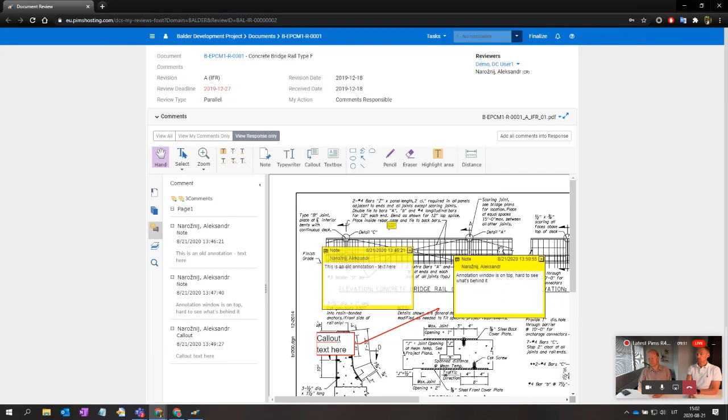Good day, if you can see my screen. So what we've heard from clients with the old version is that it's sometimes not very comfortable to use, because it's not the full screen size, and sometimes the content is just on top of the comments, or comments on top of the content, so it's not that easy to work with.

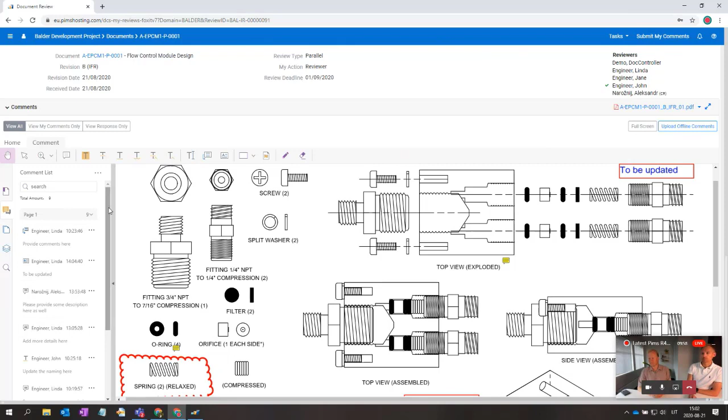So with version 7 we have rebuilt our review application and utilized the latest and greatest Foxit 7. Now you see it's more like full screen, and the biggest improvement we had was the side panel, which now contains all the content of the annotations.

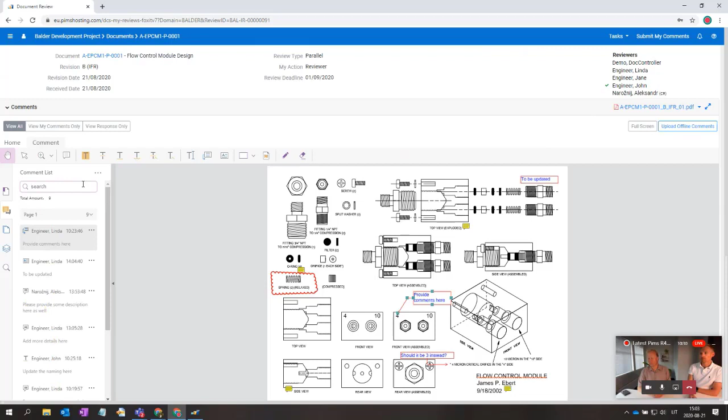So it's fully functional. If you see any annotations there, the text is provided in the list. You will see the whole list of annotations. More than that, if you just click on them, it will scroll to the correct page and highlight it. It's also searchable, so I can see comments by person or by text, like this.

Now annotation tools also support undo and redo features. So if you type something wrong, you can just use control to undo it. And with this latest version, we have improved tools like pencil, clouds, and annotations, clouds, rectangles and circles, for example.

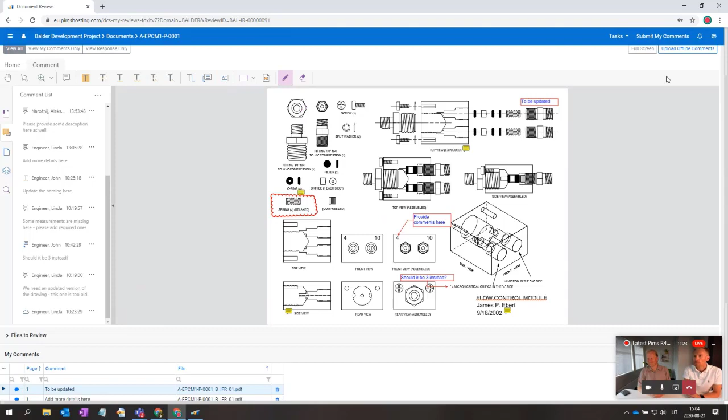So now you see I'm doing some markups using my pencil, and it will be one annotation, not separate strokes as it was before, which is quite comfortable to use. Full screen is what we finally have. This is fully functional full screen. You can just even hide the comments tab, and there you go.

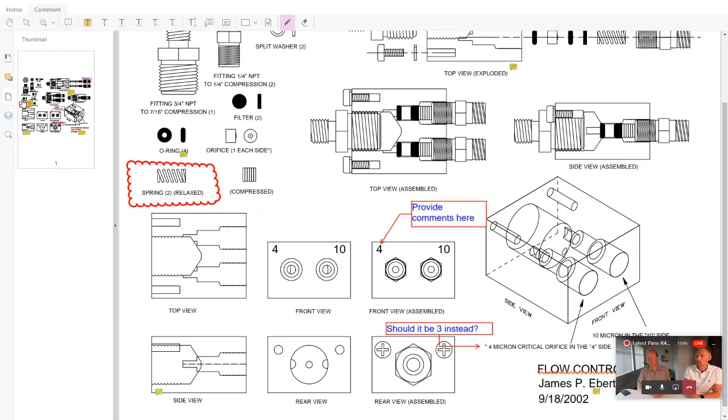Version 7 of Foxit also has improved performance on huge files with several hundred pages, which is quite quick. You have this thumbnails panel where you can just scroll very quickly and see all the annotations in there. And also just to mention that while rebuilding this application from scratch, we've tried to have as minimal read and write operations to the database as possible, just to improve the performance for users.

So that's it from my side. If you want any more details, just contact me or anyone in our teams. Thank you.

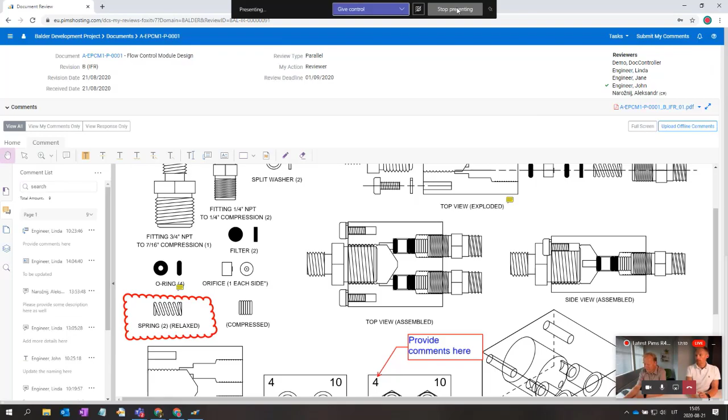Okay, very good. There are also various other updates in this release, but I think for document control, this Foxit update is for sure the highlight.

Also, Pims cost management - we've had a project there for a while to make it fully available in the browser. And Alexei has some news to share with us on how that's progressing.

Hello everyone. As Johnny mentioned, the Pims cost management has been moved to web, fully functional. Subscribe to our channel to see more videos later on all the other functionalities I will be showing in other videos. But today I'm going to show you just a few good things we've implemented in the web version. So I will now share my screen.

Okay, so one of the cool features we have in the new web cost management is that we've implemented an import phasing mechanism.

Basically, the reason we did it is that in time phasing, cost engineers typically have their models built in Excel files where they do the time phasing from left to right. They typically want to see it like a curve going from left to right, and they usually have huge files, something like I'm going to show you now. This is a typical file the cost engineer would have with all the different phasing models in here.